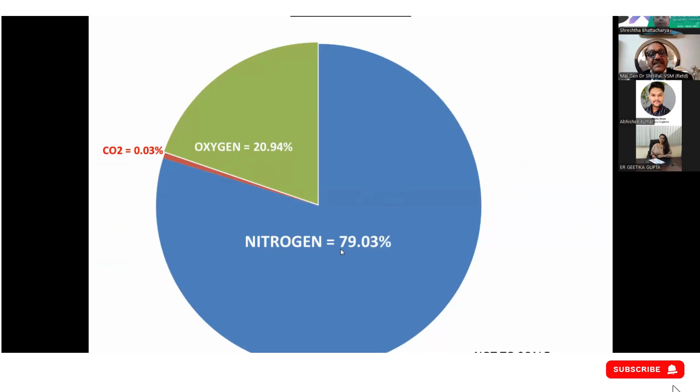It contains nitrogen 79%, which is a neutral gas, oxygen 20.94%, and carbon dioxide very less, 0.03 to 0.04%. So when we inhale this, the nitrogen comes out as it is, oxygen is consumed by our body, and CO2 level increases. So this is causing the problem.

Now this was the graph I was talking about. This graph shows the carbon dioxide content in air from the year 1000 to 2016. You can imagine that for thousands of years, up to the 19th century, the environment level of CO2 was 280 to 300 parts per million. But the problem started after the 19th century when the industrial revolution began. Now it is increasing exponentially.

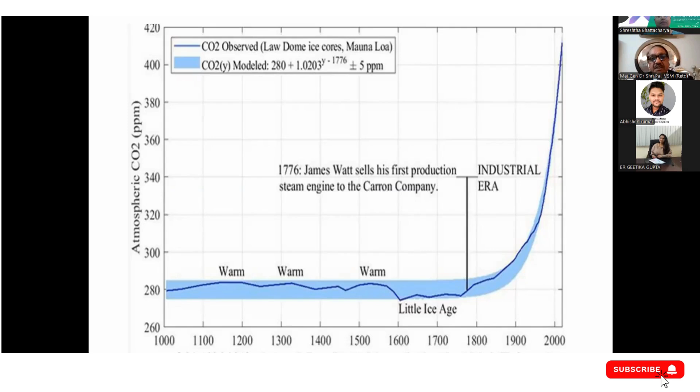Now it is increasing, and today the world average, as I told you, is 425. But in a place like Delhi, it is already crossing 500 parts per million, and it is increasing every year. You can see in 2022, 417, 419, 422 — every year it increases by a factor of 3 to 4.

So if we do not arrest this rising trend, then this is our future. This is the same graph I have plotted. By 2090, we will have CO2 content in air increasing beyond the safe limit of 800 parts per million.

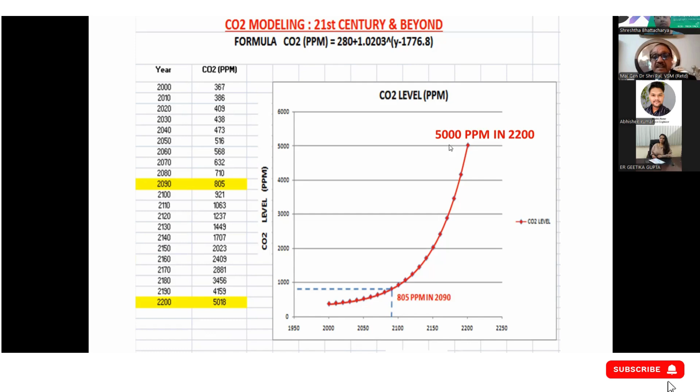This 2090 is not far off. In fact, in Delhi, it has already reached. By 2200, the carbon dioxide content in the outside environment will reach a very dangerous level of 5,000 parts per million. This is expected if we don't arrest this.

I have carried out a lot of studies for the past 2, 3 years throughout India. General drowsiness, you can feel in your room. People go to sleep. Even in a car, when we travel, you go to sleep very fast. Then after 2000 ppm, there are adverse health effects.

So this is what is worrying the world now, and that's why the whole world is talking of carbon capture and carbon emission, and they feel a danger to the basic survival of human life on Earth.

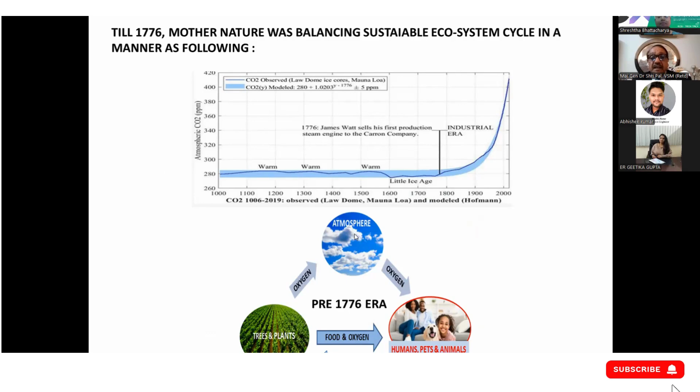Now, what was happening for all these years? This was the sustainable cycle already existing on Earth. Whatever CO2 was generated by us, our trees and plants were able to absorb this, and they were providing us oxygen and food. This was a sustainable cycle.

What did we disturb here? We created industries, we created a lot of traffic, and we created extra carbon dioxide on Earth because of industries, traffic, and our air conditioned buildings. On top of that, we started deforestation, cutting trees, and the population moved from villages to big cities like Delhi NCR, so the number of trees is reducing.

So what is the solution? This is the Bunkerman concept. This is what we have got: whatever extra carbon dioxide which we are generating on Earth by ourselves or by any other means, which is not being absorbed by the natural system, should be absorbed by a technology like the Bunkerman technology.

So we are absorbing this into our filters. After our filters get saturated, which takes about 2 to 6 months, we provide new filters, and the old filters we send to our organic manure plant. This is located in Uttar Pradesh, and we convert it into organic manure.

This organic manure is given to farmers, and it provides nutrients to trees and plants. Their production is increased, and they provide us more oxygen and food. So this way it will be a sustainable cycle. This is our concept.

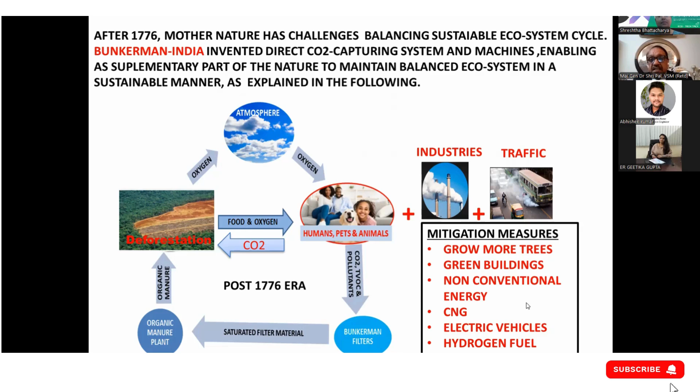Now the government is taking all initiatives, like promoting growing more trees, green buildings, non-conventional energy, CNG. But all these measures we have been taking for about 30 years. Despite all these efforts by the government and society, is this graph stopping? No, it is not stopping, it is still rising.

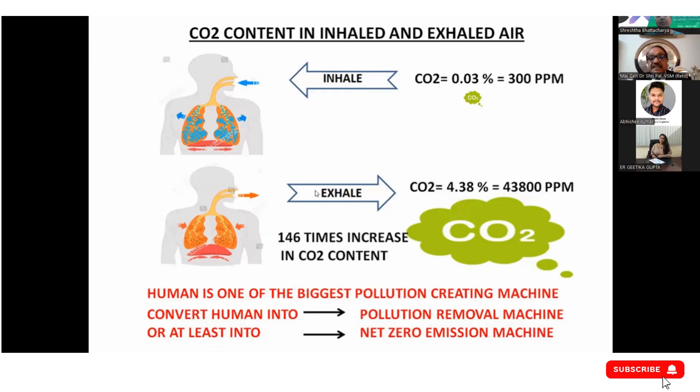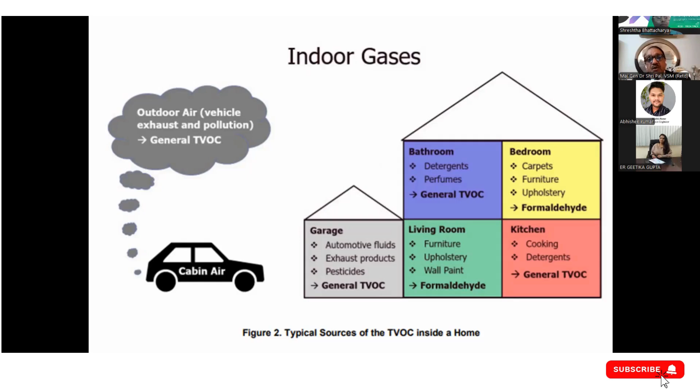So what is the reason for this? The reason is what I explained: each person is multiplying CO2 in the environment by a factor of 146 times, you can see this calculation here. There are other gases inside the house too, called VOCs, generated from furniture. So we absorb carbon dioxide and VOCs in the house and convert it into organic manure, sending it back to the organic manure plant.

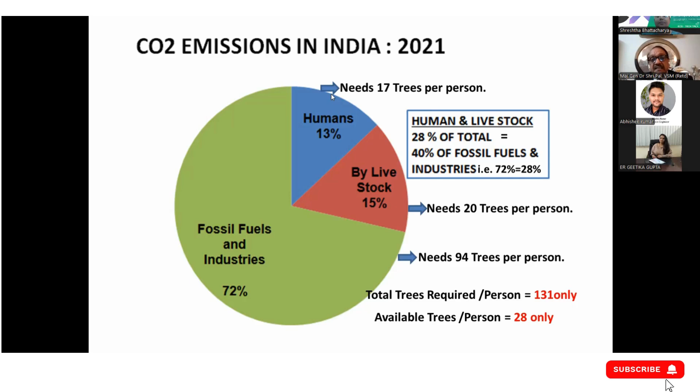Impossible. And see this international statistics. India is having 28 trees per person. But see this, a small country like Suriname in South America is having 15,000 trees per person. Canada is having 8 to 9,000 trees. Finland is having 4,000, and Russia is having 4,000, Australia 3,000, Sweden too. So all these countries are having more than 1,000 trees per person.

These countries are having more than 100, 500 trees per person. We should be thankful in India to all these countries which are having more than 1,000 and 600 trees per person. And see our neighbors - this is a bitter truth. Pakistan has just 5 trees per person, Israel has 2 trees, Egypt 1, Singapore 0, Saudi Arabia 0, Qatar 0, UAE 0, Bangladesh 6.

And they are the ones who are affecting our climate. That's why India's cities like Delhi, Bangalore are suffering because of the high level of pollution.

Now I will give you some successful case study. This is one case study which we have provided in Guwahati refinery recently. In their DDCS control center, we provided this new technology of the system. And ever since we have provided the new technology, their corrosion problem is totally solved.

And we are able to save more than 30% electricity because of that concept that we have avoided the air change per hour. If you avoid air change per hour, your AC plant design capacity is reduced by 25 to 30% in the first step. And then when you run it, you again save electricity of 25 to 30%. So total about 50 to 60% is the saving in this project.

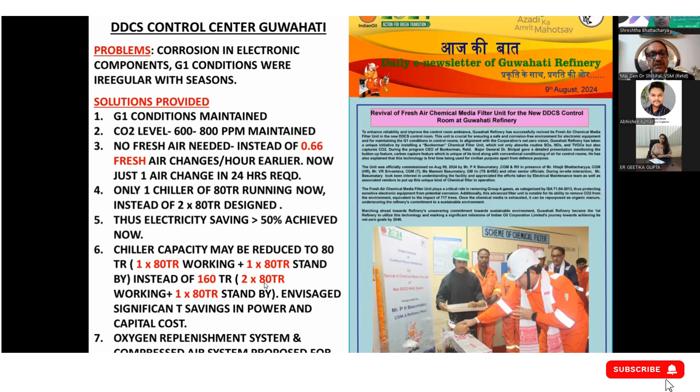And it is a practical thing. Not only Guwahati, it has been proved in other places also - like in Delhi, I'm using this system in my house, in factories, and some other offices have used it. Everybody is agreeing with this concept that yes, it saves electricity.

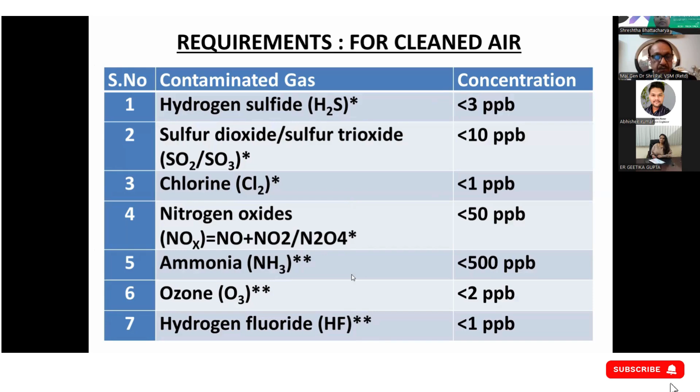Now see these type of gases in a refinery - these were very dangerous gases, which we have been able to absorb and convert them into organic manure. That is also a challenge.

Now this is the small system. This can be integrated with the existing air conditioning plant. This is just about 4 meters long, 1.5 meters wide, and 3 meters high. And this is what we are suggesting in all air conditioned buildings in India, whether it is a hotel or a hospital.

You install this plant, and this will cost only less than 1 crore. It is costing 50 lakhs, 60 lakhs, 70 lakhs rupees, and that cost will be recovered by the organization within about 2 years of time. And after that, it will give the saving.

Imagine the amount of energy which is being wasted by this air change per hour. This also brings me to another question - it's about what challenges do commercial and industrial consumers face when they try to transition into this type of technology.

What are the challenges they face? Now madam, first challenge is to get convinced because seeing is believing. Two years back, as I told you, I opened this with the scientists because it is a new technology - it is a miracle. So people were not believing. Still, there is hesitation among people that no, we cannot survive in a closed environment without fresh air. But on the contrary, everybody is staying in a closed environment and without fresh air.

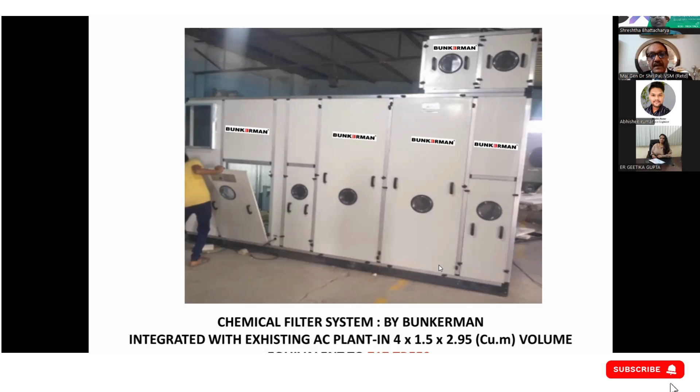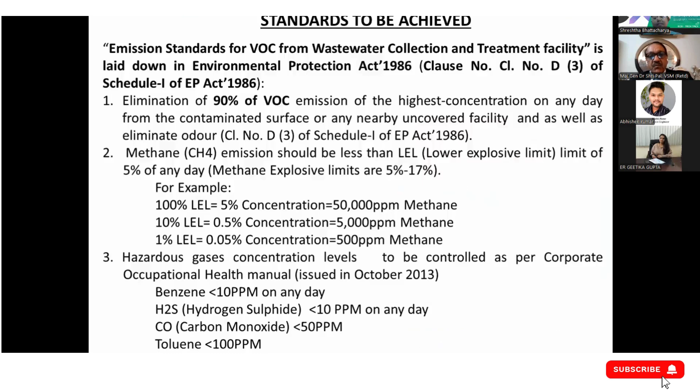And I come to your question now, how it will be measured. I will tell you, these are the filters. I will come to that slide. Yeah, this is the system, madam.

This we are giving in the houses. So this system firstly gives clean air, it absorbs carbon dioxide and VOC in the environment. And here there is a computerized system which records how much CO2 has been absorbed by this system. So this measures the quantity of carbon dioxide being absorbed in the room.

I will show you, this monitors the carbon dioxide level. So see, I was showing you this system. This is the indoor air quality management system, which is used in a house or in an office. This firstly removes the CO2 and carbon dioxide, and also this can be used in button-up mode, which I will explain subsequently.

It records the CO2 and TVOC. And what I was talking to you, your question was how you record it, how much carbon dioxide it has absorbed. So we have given a setting button here. If you press this setting button, then it is displayed here, the filter running time. This particular filter has run for 24 hours, 21 minutes, 15 seconds, and it has absorbed 2.07 kg of carbon dioxide. So this is recorded.

This is based on the calculations and physical data collected by this device inside the room. So this way, this will be an official, authentic record, which can even be audited by organizations who come for auditing of the carbon capture points. So this way it solved the problem.

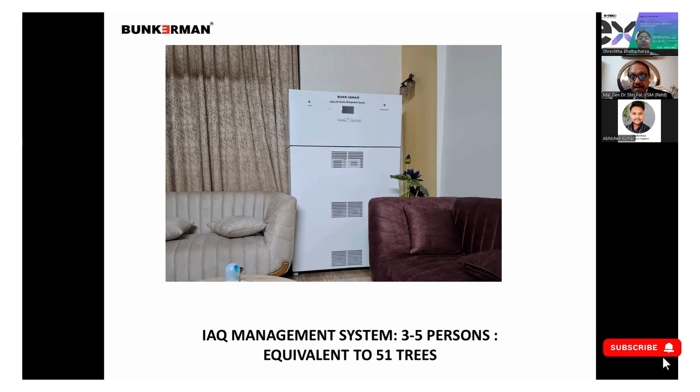In button-up mode, the system adds compressed air from this side. On the right side, we have given a compressed air switch. There are two oxygen cylinders inside this unit, and it adds oxygen to the room so that the pressure remains. We can also set the pressure here, so it keeps your room in positive pressure.

Why do we need positive pressure? Because even though we are sealing the house from all directions, if there is some leakage of air, the outside air should not enter your house if internal positive pressure is maintained. The unit automatically maintains this positive pressure, and you set the reading.

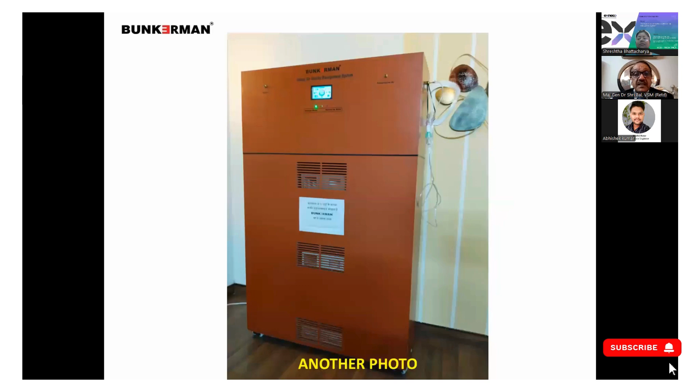You can stay in your house for about 20-24 hours without needing any extra oxygen, because the house already has more than 20% oxygen present, but this will take time to reduce. Once the oxygen level comes down to about 17%, another nozzle called the oxygen nozzle automatically adds oxygen to the room, bringing the level back up from 17 to 21%. This button-up mode gives you total safety in your house.

You can stay in your house for 7 to 10 days comfortably without breathing any air from outside. This is a great achievement, and this facility is generally provided in submarines which go underwater. It's also used in nuclear bunkers, where you have to survive in a closed environment without taking any outside air for human inhalation.

This will be a great achievement for India to provide safety to all citizens in case of any disaster like a biological disaster, chemical disaster, or even a corona-type disaster. Wonderful, that's all.

My last question for the talk is regarding what message would you like to give to the young entrepreneurs working in this area?

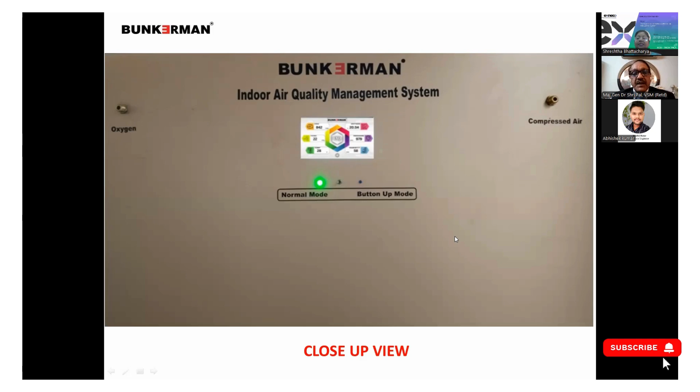For young entrepreneurs, I've been giving lectures at colleges and universities, and there I tell students that firstly, I have very good ideas in my mind to work on a few projects. I have come up to this stage to give this system, but there are some new ideas in my mind where a lot of R&D is still required. I will share with you, just a minute.

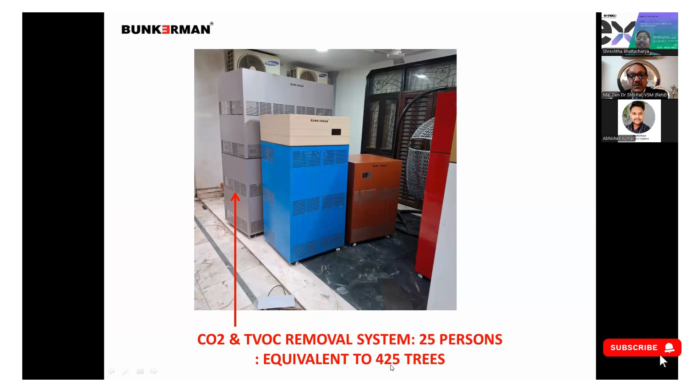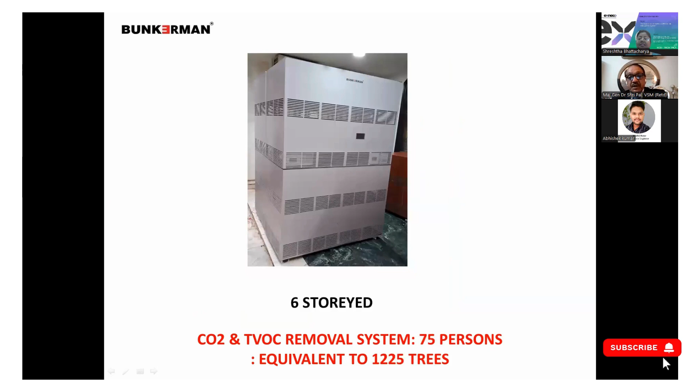Now these are some systems we have for hospitals, bigger systems. They can remove CO2 from the environment equal to 425 trees. These are for 25 persons. Similarly, we have units for 50 persons and even up to 75 persons. One unit can absorb CO2 from an environment equal to more than 1,200 trees.

Now another point I want to convey to you and to the youngsters: recently the Government of India published a notification, the Green Credit Program. They are giving a lot of boost to such technologies like Bunkerman technology - if you use a technology that can clean the environment, you can claim green credits now in India. This Gazette notification was issued in October 2023, and detailed guidelines are being issued now by the government. So whosoever uses this technology can claim green credits or carbon credits from the government.

Now, these are some thoughts for future generations and youngsters. Each human being generates carbon dioxide while inhaling and exhaling. So when two people meet in a cafe for a meeting, we are now making small devices, the Bunkerman CO2 and TVOC removal system. This device weighs only about 1 kg. When you leave for your office in the morning, you can take this device with you.

It has a small filter weighing about 1 kg. Wherever you are speaking to somebody, you place this device and switch it on. It works on battery and can be recharged. Then whatever CO2 you generate while inhaling and exhaling will be absorbed by your device.

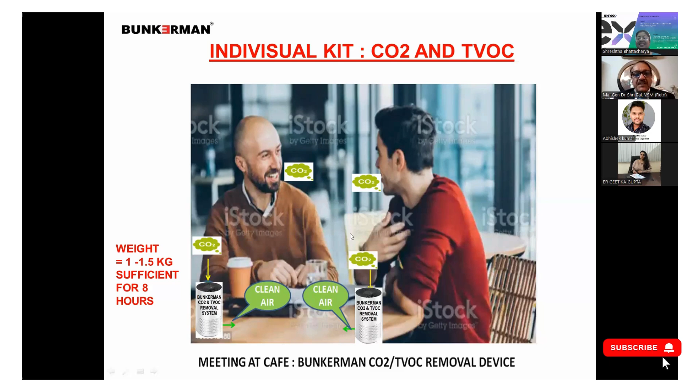In countries like Japan, people have been following such good habits as citizens. Now, similarly, when you travel in a metro, take your device with you. This R&D has been completed. Very soon we will be manufacturing this device and sending it to the market. It has not yet reached market level, but this is the thought for future consideration. Some more R&D is required to be done in this.

Now secondly, in cars, as I told you earlier, when you sit in a car, within 5 to 10 minutes of travel, because the space is restricted, the CO2 level rises to 2,000, 3,000, 4,000 parts per million. People go to sleep, you feel nausea also, some people vomit also while traveling in a car or bus. So this is the reason the CO2 content is much more. So we are devising this device. R&D is going on, very soon we will come out with a solution for this also.

So this is the project which can be taken up by the young generation, students, young entrepreneurs. Under our guidance, we will guide them how to do this. Some R&D is also required in this, and government's help is required for R&D, because whatever research I have done so far is my own personal effort. There's no government help or government aid being given to invent this technology. But if the government supports this technology and there are schemes in the government, then this technology can be developed so that we can have a system in cars, and even outside, we can place some systems in the car which will clean the environment.

So you can see this: each vehicle can remove carbon dioxide from the environment with bunkerman technology equivalent to 70 to 500 trees per vehicle. Now you can imagine, we are blaming the traffic on the roads, saying they are creating pollution. But with bunkerman technology, if this is implemented after due research, then this moving traffic on the road will clean the environment. They will be like a moving forest on wheels. So this is the concept which we should adopt.

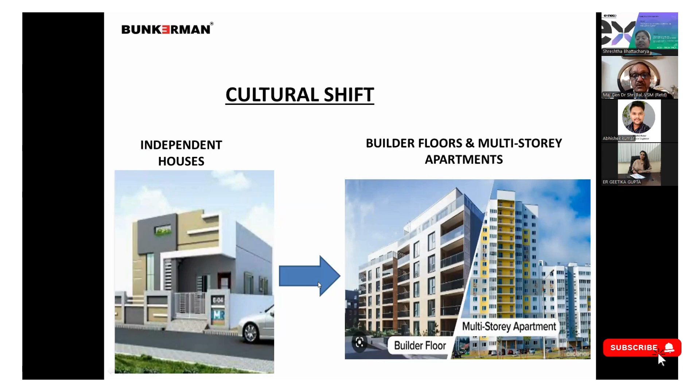Similarly, in houses, as I have already told you, we are shifting people from villages to multi-story houses. And even if you have a building with 100 flats, this can clean the environment equal to 20,000 trees. So concrete jungles can clean the environment 1,000 times better than a green forest. This is our mission.

Similarly, in trains, I have recommended to the railway minister in India, because when you travel in the train, the same thing happens. Though we have an air conditioning system, the CO2 level inside goes to 2,000, 3,000 parts per million. I have not found anywhere less than 1,500 parts per million CO2 in the indoor air of trains. Even the best trains recently introduced in India, I have carried out the survey, and the CO2 level should be below 800 ppm, but nowhere is it found less than 1,000 ppm.

So if you provide this system to aircrafts also, it would be the same. In aircraft also, madam, I have found when we board the flight, I have personally checked while boarding, the CO2 level in the aircraft goes to 3,000, 2,500 parts per million. But after the flight takes off, they have a very good system of refreshing the air, they add fresh compressed air again. And then the CO2 level is generally kept around 1,100, 1,200 parts per million. It is still not less than 800 during flights. And that's why most people in the aircraft also go to sleep very early, they just have their breakfast, one meal, and go to sleep.

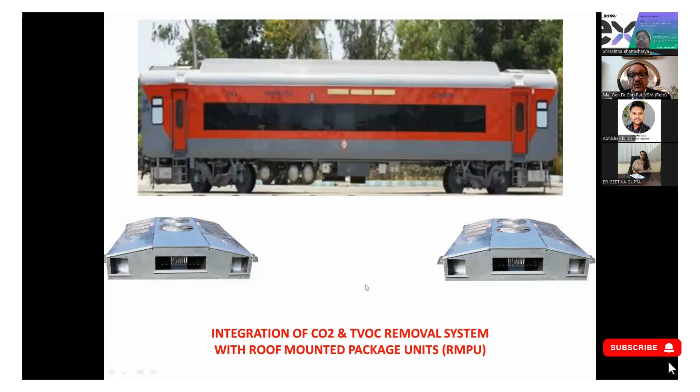In trains we will save this with the Bunkerman technology. Imagine a train, even with 20 bogies, each bogie having 72 persons - a moving train can clean the environment equivalent to 24,000 trees.

This is the concept for the future. Let future generations work on it, let government accept it and give funds for more R&D - this is possible. Moving traffic on roads will clean the environment, moving trains will clean the environment, and the conclusion is that we have to adopt sustainable processes today to save our earth for future generations.

Public awareness through education is a must - that's what you and I are doing today. We have to spread education and awareness to the public that yes, there is a technology which exists, and we have to save this.

I have written to the Prime Minister, I have written to all ministries that we have to save this world from destruction. Hamein duniya ko tabahi se bachana hai.

India can do it, madam, because the technology of Bunkerman is totally Indian technology - made in India, made for India first. I have requested our Prime Minister Modi ji to take this up. In the G20 summit I made this point, that you have the cooperation of other countries and cities, and we have to move on your philosophy of Vasudhaiva Kutumbakam. We have to do it today.

As President Obama once said in COP21, we are the first generation to feel the impact of climate change, and probably we are the last generation that can do something about it, because our future generations may not get a chance to stop this rising trend. It will be too late. So the time to do it is today.